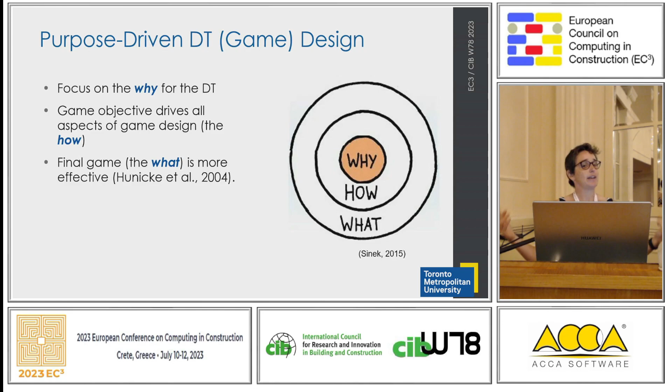And then the final game, the what, winds up being a lot more effective when you actually use these principles.

So in order to define the user needs, we needed to actually come up with some user profiles. So we came up with 4 different sets of groups who might be interested in actually seeing the building.

First, we've got people from the broader community. This might be the campus, this might be neighbors, this might be potential donors, politicians, whoever, right? And we said, okay, what do they care about? Well, they want to be able to see the building. Maybe they want to access some of our publicly available data, our space usage reports, our energy intensity, our energy meters.

Next, we're going to have visitors to the building. Well, visitors to the building might want to do the same thing as the community members, but they also want to be able to navigate, right? They need to be able to figure out, find their way around the building. Maybe they have a meeting in a lab. Maybe they're a new student and they're trying to find their way to a new classroom.

Then we have facilities management personnel. These can be our own staff, or they can be contractors from outside. So they might need to actually have a path to a piece of equipment that's actually drawn for them and actually walk them through how to actually get to where they're going. Then they're going to need to be able to locate the equipment in the space, identify faults, access the current equipment data so they can actually start to run some diagnostics and say, okay, why am I here? What's the data showing?

And then we've got the facility managers and the engineers and the operators. And they need to do all of these, but they also want to be able to run what-if scenarios, access recommender systems, and optimization. And this is actually where this touches with a much, much larger project, where we're actually trying to create a cognitive digital twin of our university campus.

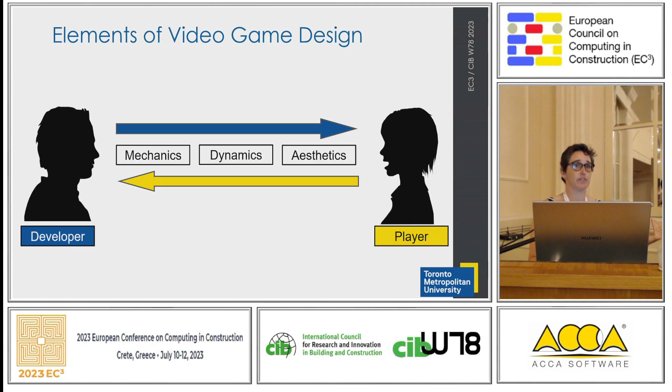Behind that is, how do you experience playing through? How can you navigate? What can you do? How do you interact? And then the mechanics is really that layer that's hidden underneath, which is what are the rules that govern the universe that you're managing and you're actually going through.

So if we talk about our digital twin mechanics, the first one is player autonomy, right? And these are some fundamental questions that we have. Can our user fly? Are they limited by gravity? Our facility managers want to be able to teleport and instantly go to the location of interest. They want to be able to instantly go where they want. They want to be able to pass through walls, see through walls, have x-ray vision, etc.

But for wayfinding, the ability to fly and pass through walls is not going to give you a feasible thing. If I tell you to go upstairs by going up through the ceiling right now, it's not very helpful. You actually have to be navigated to the stairway and actually have those constraints. So certain player modes are going to require different levels of autonomy.

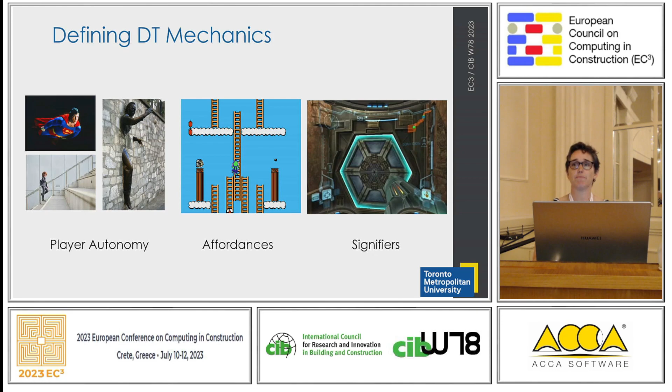So when we're defining the digital twin mechanics, we actually had to come up with these modes. The first mode is the see it mode. That's just, we're not assuming that you want to find your way around the building. This could be anybody using it, so you can teleport to your location of interest. Maybe you want to see what's on the 9th floor, and then maybe you want to access a publicly available dashboard.

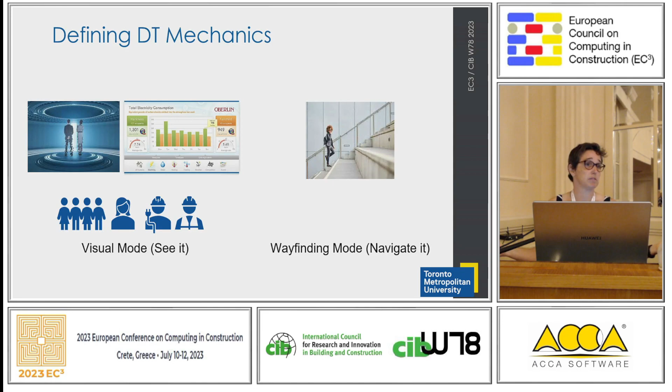The next one could be the wayfinding mode. I need to find my way to a certain thing. So this would be the three groups that we'd expect to be on campus: anybody visiting, any of our trades, any of our staff. They're going to want to do things like climb stairs, because they're going to need to find those paths.

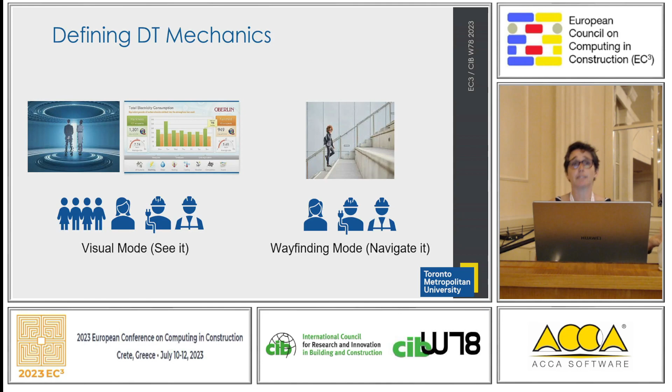The investigate it mode, you have all of these abilities: you can navigate, you can teleport directly, you can pass up and down, you can use the wayfinding if you want, you can see through walls, you can pass through walls. So you have unlimited freedom of movement, but you can also see all of the inner workings of the building. This would be primarily for our facility management personnel. So really thinking about who's going to be using it and why and what they're looking to get out of this.

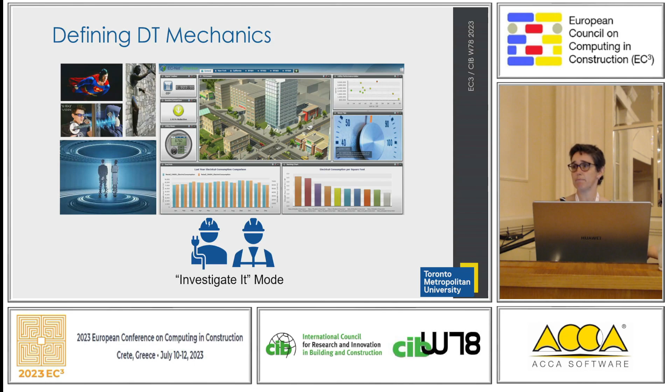And then finally, we have the operate mode, and this is the one we're in the process of actually implementing. That doesn't just have the visualization and the ability to query data, but has the ability to change the data. So right now, just full disclosure, facilities management does not let my research group actually change the controls in the building in real time. But they have agreed to let us run some simulations and run some experiments at night to increase the data domain, so that when we're training our algorithms, we can have recommender systems saying...

You know what, you can save about 10% off of your chiller if you increase your set point temperature from 7 degrees to 8.5 for the next 6 hours, given the weather, and this is the simulation that shows that this is right. So the ability to run these what-if scenarios and really start thinking about how we can reduce energy in real time and bring online optimization into it, which is probably actually more my core research. This is just the fun way of actually presenting it.

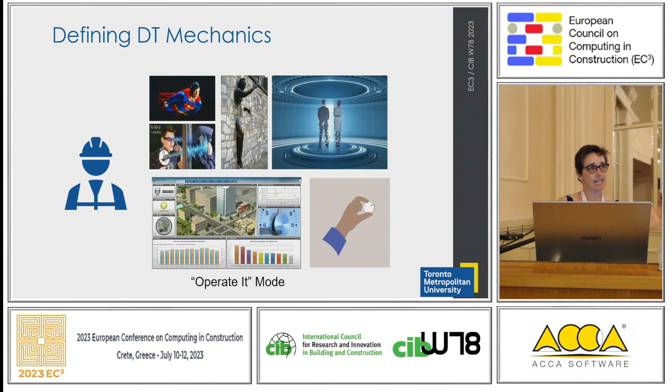So now that we've defined the mechanics of how the digital twin works, let's think about the dynamics of it. So you need to be able to find your way through. We need to figure out how to not overwhelm the system.

So this is designed to actually run within a window, just a little web browser. So you can access this on a tablet, you can access this on a little computer, you can run it on a PlayStation. So we needed to not load the entire system. I've got 14,000 building automation points live streaming into this building. Every single piece of mechanical equipment is actually developed.

So there's a huge amount there. We don't want you to be able to load anything you can't see. Just like if you play a Nintendo game, it only loads the part of the world that you're in. Otherwise it would overwhelm the system.

So we developed these blueprints using the Unreal Engine that actually allows us to replicate it, and we have an automated system to bring any new building in. I've done work presented at previous conferences on creating lean FM-enabled BIMs suitable for this sort of facilities management work. It's just your walls, your rooms, and your major mechanical equipment, and then actually being able to map that equipment in to query into the database.

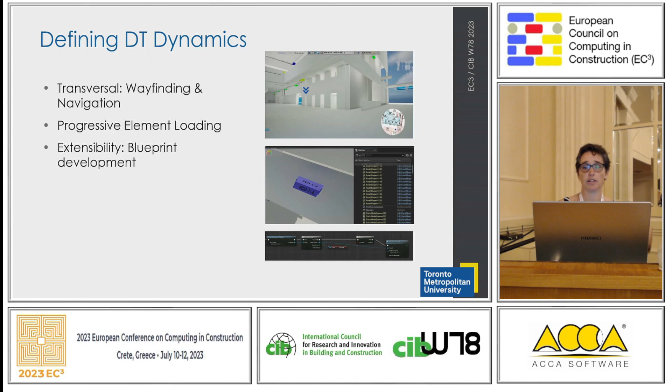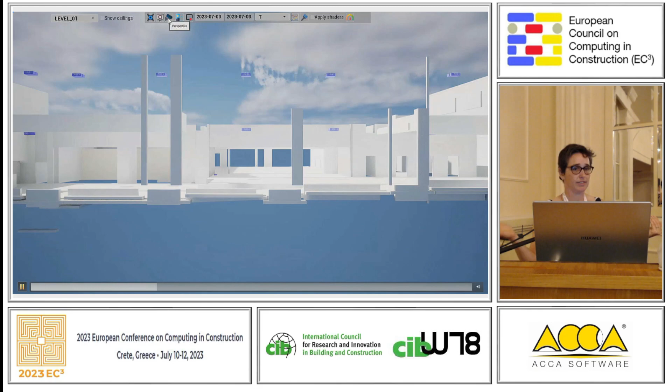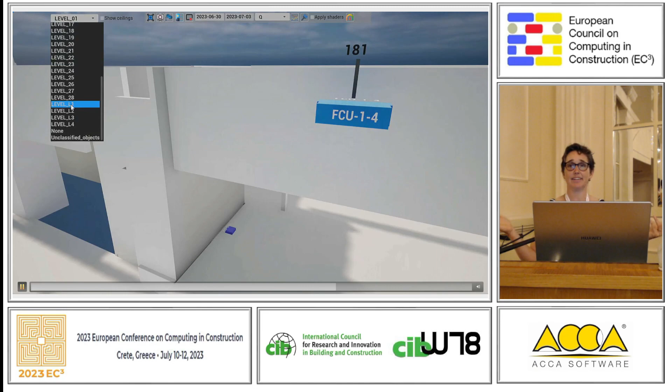And there's the cognitive digital twin paper referenced in this, which gives a bit more background on how all of that works. So let's look at this. This is our 'see it' mode. As I say, you can just jump straight to a level. This is what we call our mid-resolution version, so you have different ways of looking at it. You can navigate, you can pan in, and you can even query some of the data, so this can give you some sense of what's actually happening.

All right, so this is a little bit souped up from the see it mode in terms of what you can do.

The next one is a more rigorous investigative mode, and this allows you to look—actually, I think I might have put the same in twice. Yeah, I did. All right, so this was the investigation mode where you can actually see we're querying the data in real time. We have a federated data lake that allows you to say which is this equipment, what's the point, access the time stream data, and then display it.

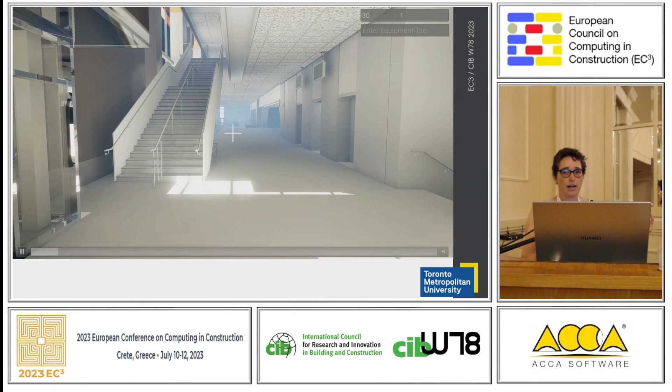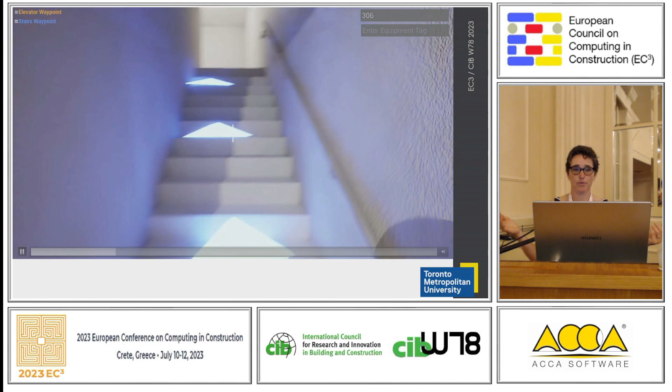The next one we have is our 'navigate it' mode, and this is where you can actually go through. Say you're a facility manager or a contractor, you know you need to go to room 306, so you've got the choice of taking the stairs or the elevator. Here it's just two floors up, so let's take the stairs. We wanted to make it easy enough for our facilities managers to see where they're going, and we outline the door to the room they're accessing in red, so you've got a sense.

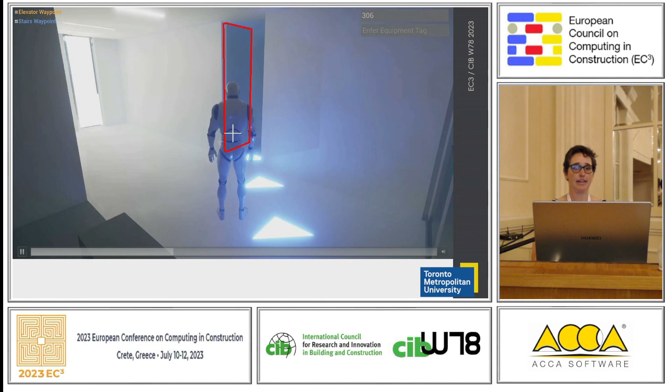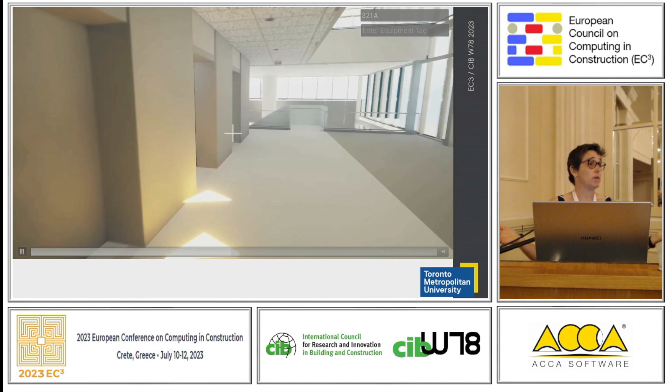Now say they wanted to go somewhere else, and you can move over—this time we're going up to the 8th floor. There's no point taking the stairs, so we're going to take the elevator to go up, and this allows us to go all the way through, once again showing where we're going.

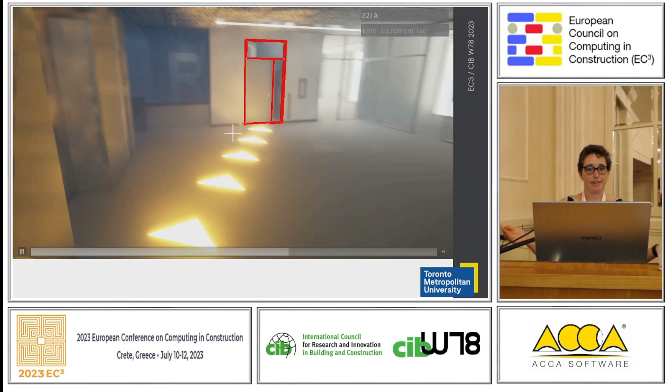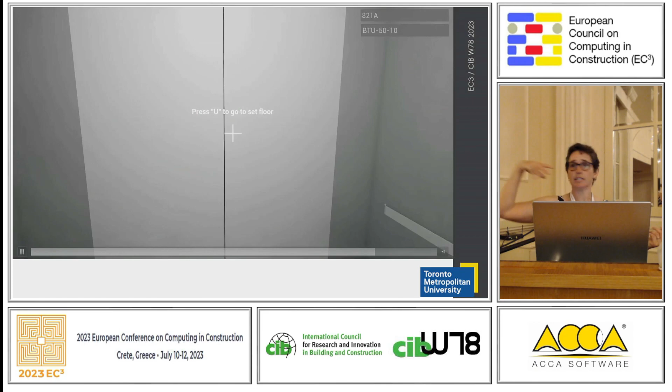Now the last one is: what if you're actually trying to find a piece of equipment? This is where the back end makes a lot of sense. We can query this BTU number 50, and it will query—we've got a graph database behind the scenes that tells us what room that's in—and it will then navigate you to that room. It's got a Pathfinder algorithm baked into it, so now you can address it. You can turn off the ceiling so you know exactly where you're looking, and this is actually engaging with the construction-level BIM.

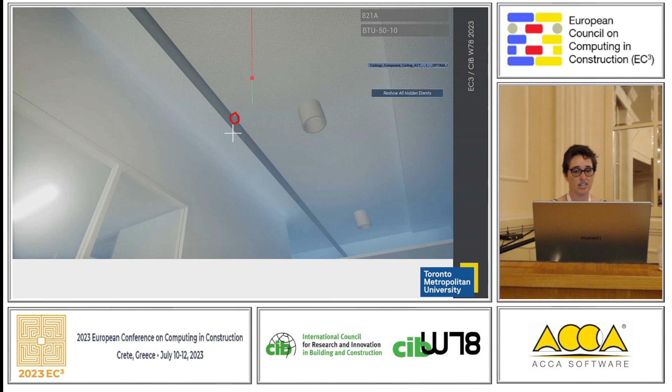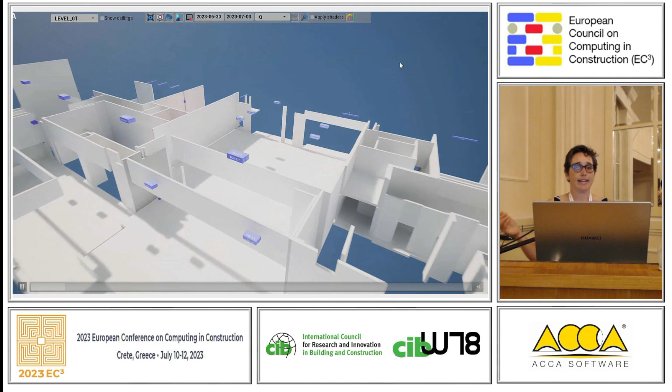Again, this is another view of this investigative mode, now looking at a little bit more of a rigorous inquiry into some of the data. You can actually look at the historical data—the light blue is the unit we're looking at. Now you can select two additional units, look at them side by side, and see if we're seeing different things. This is Q, the air quality, the CO2 measurements.

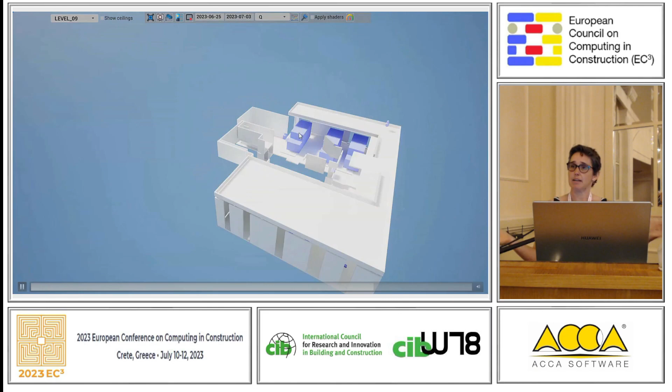Now we're going to jump into the mechanical space, so you can get a sense of what kind of equipment we have, and you can see all of the most recent change of value data for that equipment. So if you're an HVAC engineer and you want to see what the equipment is doing right now, you can see this, and if you want to run trends, you can do that as well.

Next, we have to define the aesthetics. There are a few common things you can set in the user interface for the way the aesthetics are presented. How are you going to present the data? What color schemes are you going to use? What's going to be the graphical feel? And thinking about the user experience, what's the mood or atmosphere? How easy is it to use, and what's the intuitive data context? We're really trying to take the best of human-machine interaction and dashboard development and bring those in.

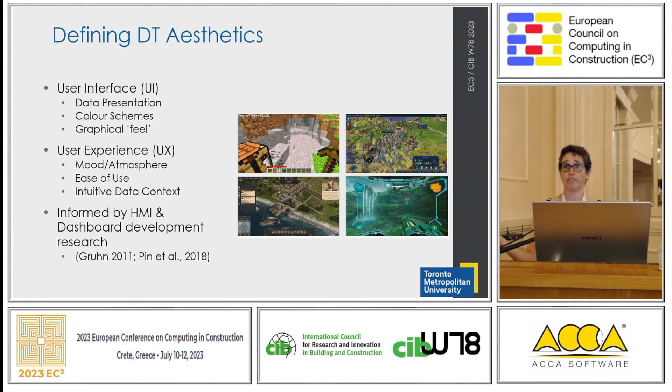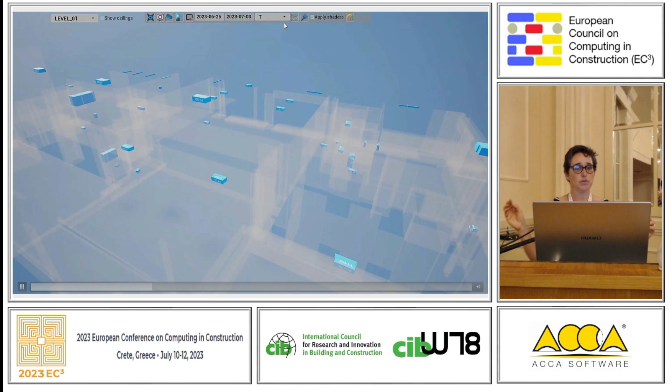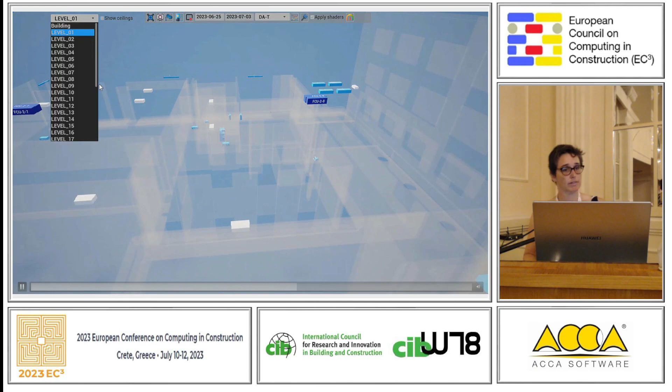We're going to look at something one of our facilities managers asked about: could you just show me the location or how open our cooling coils are? So I can see if they're all red, I know I need to decrease my chilled water temperature. If they're all blue, I can afford to increase it. Because we had access to all of the time series data, we were able to do that on the fly, which we were pretty happy with.

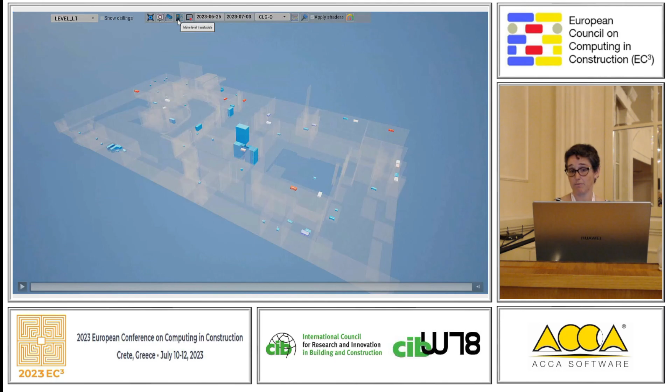So we do have a conceptual framework. Whoa, sorry about that. Macs don't like me either.

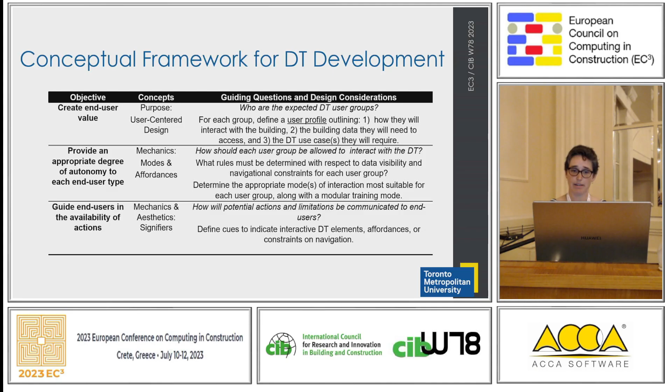So just really quickly, this is detailed a lot more in the paper. It's basically the fundamental questions that you want to ask at each stage as you apply these principles to develop a better digital twin. I'll leave that to you to read on your own.

So the findings - we did a demo about a month ago, and they said, Ken, you've shown us this too much. I said, wait a sec, you can navigate it with a PlayStation controller. They were like, okay, cool. So we had 4 people there. Their first question was, can we play with this for a month? So facilities management is now playing with the equipment right now. They're trying to play with this demo environment. They found it really intuitive, and like I said, they were immediately able to see the value of it.

So we've developed this demo environment. It's being deployed, we're doing the full field studies, and we're going to let the facilities managers develop new use cases using a lean and agile approach for fleshing this out. So we find the next use case, figure out the minimum information requirements to implement it, and then implement it. There's a difference between the navigated video I showed you and the investigative video - we're bringing all of the investigation level blueprint functionality into that higher resolution version to give the photorealistic version. We're also in the process of developing our tutorials, and we're going to be replicating it.

Scientifically, the most interesting one is we're actually starting to bring in this online interface with our AIs. So when our algorithms detect a fault, they're now automatically opening up a ticket on the system with a screenshot of the data saying, we found a fault, this is the data, we think it's this, you might want to investigate it. So it's much more of a recommender.